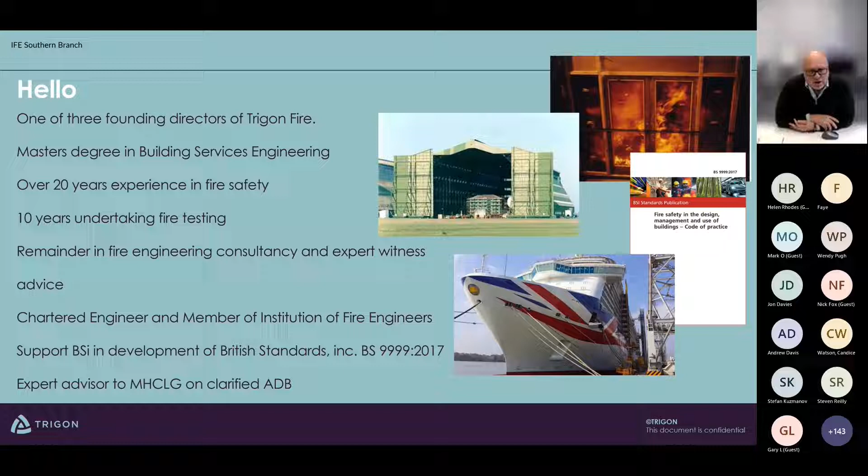I'm also a chartered engineer through the Institution of Fire Engineers. Going forward, Trigon Fire Safety was founded by myself and two fellow chartered engineers, Carl and David, just celebrating our 3rd anniversary. I don't know if you've noticed that on LinkedIn, I hope so, which has been a challenge going through COVID etc. as a new company, but we're flourishing and focused on relationships, which is the core of what we do. So hopefully through today we can start some further relationships with some of you who are present.

Anyway, let's get on to some of the technical content for today. As we know, the fire engineering community has gone through a large change since the tragic events in June 2017. We've seen all these various guidance documents, reports, and legislative changes issued in that interim period, and it's a significant amount of information to be shared, divulged, and digested. As fire safety professionals, it's been a significant amount of information to take on board.

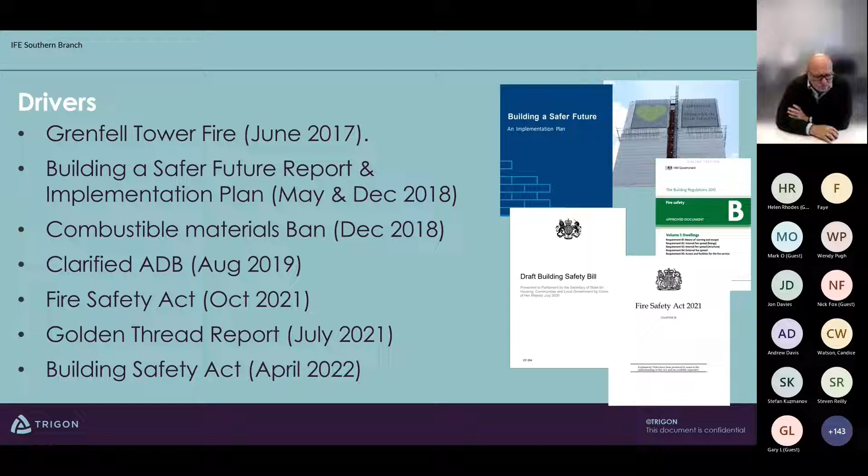It's worth reminding ourselves of the transitional arrangements and the forthcoming impact of the Building Safety Act, which obtained royal assent on the 28th of April this year, and looking at the future impacts of what we're going to see over the next 12 to 18 months from April. When you consider the amount of information and change coming through this timeline, we have to be extremely prepared, well versed, and cognizant of what is going on around us and how that's going to impact the wider industry.

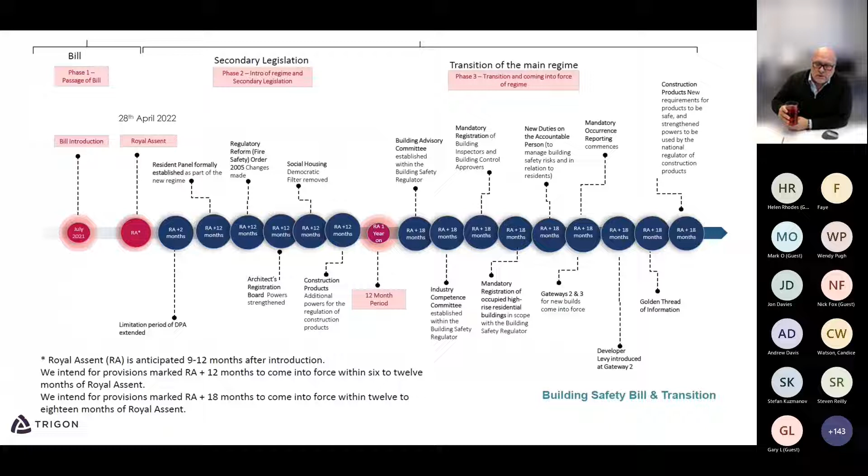Looking at this timeline, it would be my opinion that these dates of 12 months and 18 months following royal assent are the absolute maximums, where we're likely to see things changing considerably before these deadlines. So I wouldn't be surprised if a lot of this happens within the next 12 months, before Christmas of next year.

Picking up on some of the changes through the Building Amendment England Regulations brought into force this year, it was laid before Parliament on the 1st of June, coming into force on the 1st of December this year. It's an amendment to the Building Regulations 2010, where we've seen quite a few already, and it extends to both England and Wales, although it does not apply to any building in Wales. It's just a lovely way lawyers like to write these things.

It's worth remembering that these are legislative changes, not just changes to guidance. These are changes to the requirements that underpin the changes within the approved document.

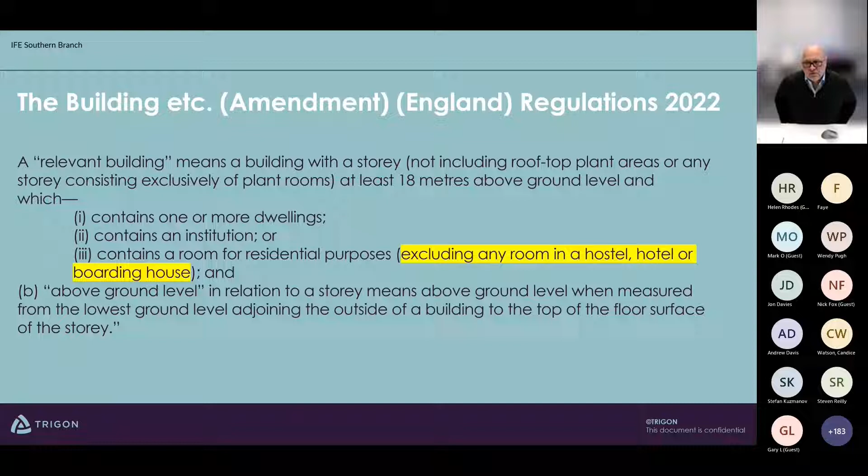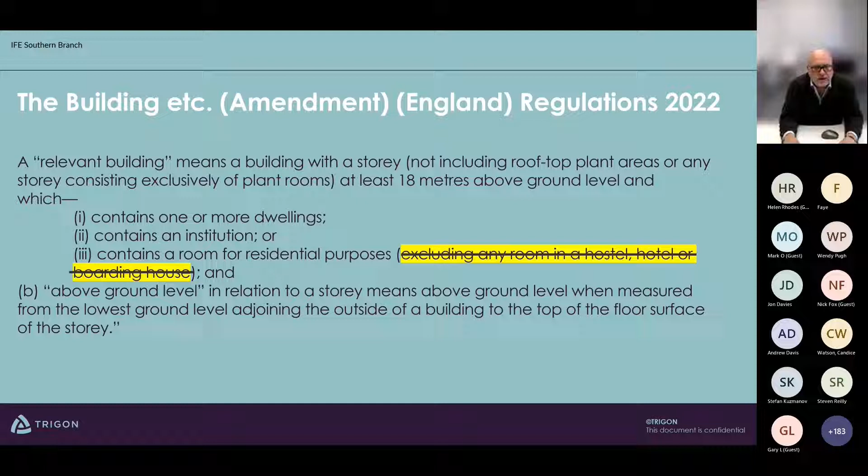One of the key changes worth pointing out is that the definition of relevant building has been changed. Previously, rooms in residential buildings or residential premises that contained a room in a hostel, hotel or boarding house were excluded from the requirements relating to relevant buildings. However, this has now been removed, effectively bringing hostel, hotel and boarding house into the definition of relevant building, extending the scope of Regulation 7.2 and all the other supporting requirements and guidance alongside that.

One of the largest, or most impactful changes these regulations have brought in is in regard to metal composite materials, commonly known as ACM and the like. It's a significant change in that any metal composite material which falls within the criteria of thickness, metal alloy, and calorific value as set out will no longer be able to become part of any building of any height on the external wall. So effectively a complete ban on metal composite material, ACM type material, across any building of any height as part of the external wall. As I've said, this is a requirement, not guidance - this is a legislative requirement.

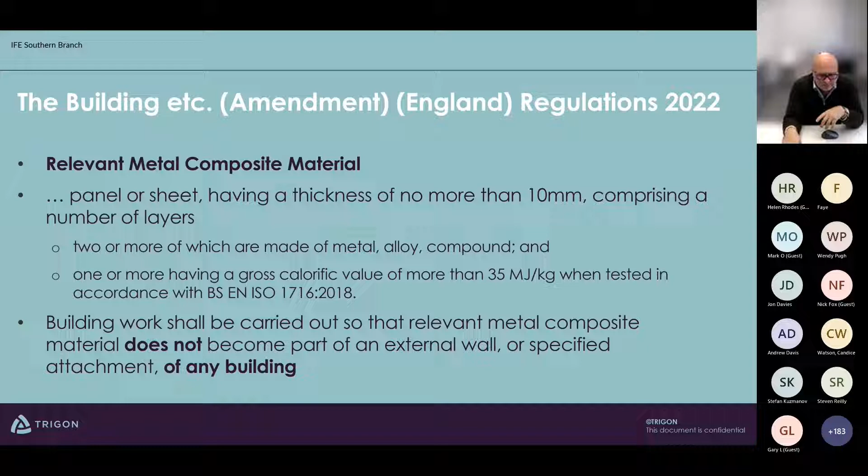Specified attachments - the definition of specified attachment has been clarified, particularly with regard to solar shading devices. Following the introduction of the 2018 amendment to the building regulations, solar shading device sales etc. were challenged as to whether there was enough consultation to actually exclude them from the ban. The definition of specified attachment has been made more robust and strengthened to ensure it addresses these aspects of solar shades, incorporating them within the definition of a specified attachment. So it's a strengthening of the legislation around that aspect.

Regulation 7.3, the list of exemptions from the ban on combustible materials as set out in 7.2, has been extended: fibre optic cables, waterproofing and insulation materials up to a height just above ground level of 300 millimetres. Again, parts of the solar shade that do not provide shade or deflect sunlight have been included within the exemptions. Furthermore, we have a new classification for flooring, where materials used on the floor that can't be correctly tested in the vertical plane are instead tested in the horizontal plane, as defined by A1 FL and A2 FL, which would be exempt from meeting the A2, A1 criteria for vertical aspects.

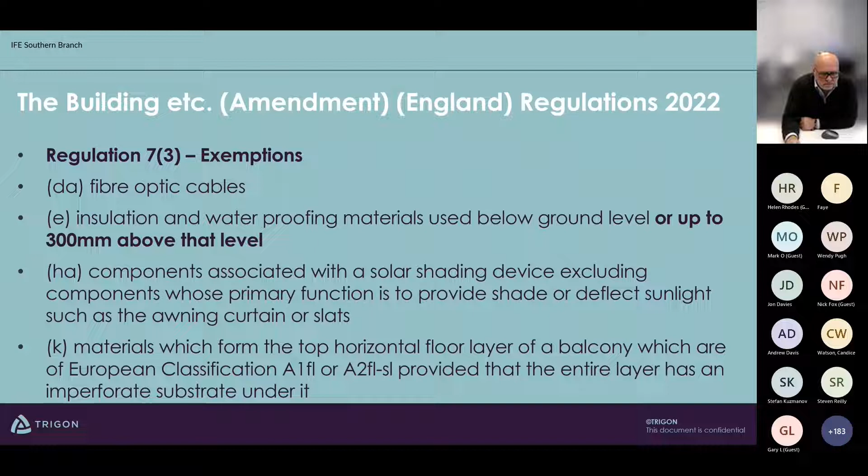This is a subtle change brought in by the amendment regulations, in that buildings, where the requirement for a change of use under Regulation 6 of the building regulations, the previous Regulation B41, regarding fire spread over external walls, was not applicable where the building height exceeded or was under 15 metres. You'd have to comply with the other sections of Schedule 1, B1 through to B5, but B41 wasn't relevant for buildings under 15 metres. However, that height has now been reduced to 11 metres of the height of the building, not the storey height, but the actual height of the building, to be more akin with other 11-metre thresholds presented in guidance and also in legislation elsewhere.

So that's just a summary of the key points of the legislation that has changed.

Now I'm going to come through and start talking about some of the key aspects of the changes to the approved document. I'd like to add two caveats here. One applies to the whole presentation: unfortunately this is quite a heavy presentation, it's a heavy subject, so there's a lot of content on the slides, so a slight apology for that. Also, I have not gone page by page, line by line explaining every change in comma, grammar, or every figure that has changed. That's really your job - I'm just trying to highlight some of the key changes to be aware of and some of the implications therein. To go through it line by line would be a whole day's exercise, so I'd encourage you to pick up the relevant guidance and go through it yourself. But this is just to give you a flavour and understanding of what those changes are and what the impact may be. So moving on to the approved document itself.

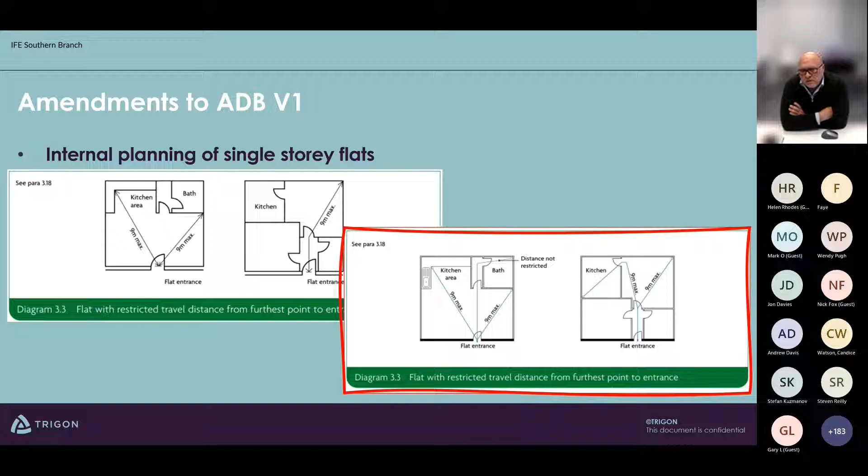So the diagrams are updated quite a lot. I haven't brought them all into this presentation, but it's worth going through just to understand what additional information they are presenting and illustrating for the reader and the application of the guidance.

Again, there's some guidance that's been updated, such as the lighting on common escape routes. Here's just an example where some people may perceive this as a lessening of the guidance, where if you've only got a 2-story block of flats, then you may not need to provide emergency lighting to comply with the guidance.

Obviously, there's still the absolute requirement to comply with the building regulations. However, the guidance may have been perceived to be a relaxation by excluding these 2-story blocks of flats. And again, it's worth going through the updated document just to see exactly how these paragraphs have been subtly amended to reflect current thinking.

Again, another one, just providing further clarification of how the guidance should be interpreted, and discussing that where a protected stairway passes from one compartment to another, it should be effectively within a protected shaft. Whereas previously some people may have said, once you're in a second compartment, we don't need an enclosure to it because the compartment protects. The protection to the compartment may be sufficient.

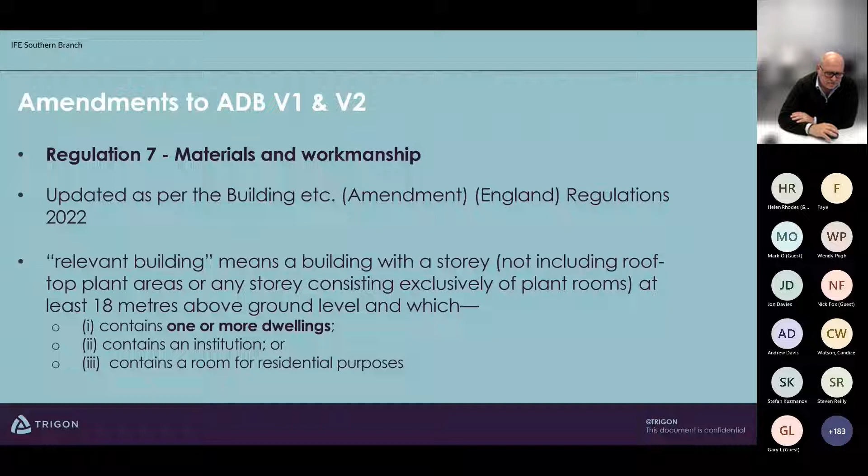One of the most significantly changed parts of the amended approved document is that information relating to fire spread over external walls has been completely replaced. So it's not been tweaked - I'm not saying that all the text and recommendations have changed, however there is a wholesale replacement of the text and introduction of new text. So this is a part where I would recommend that people spend some time to refamiliarize themselves and double check exactly what subtle changes there are.

However, one of the largest changes I identified was that further restrictions akin to the legislative requirement for the ban on combustible materials for relevant buildings has now been reduced down to buildings more than 11 metres in height. So here you can see highlighted that all residential buildings, purpose groups 1 and 2, more than 11 metres in height, will now have the same reaction to fire classification for their external surfaces of the wall as relevant buildings above 18 metres.

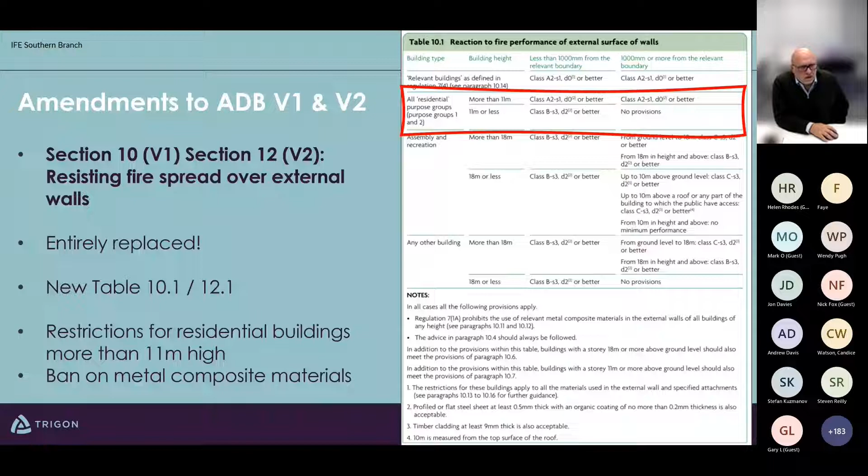Similarly, rather than just looking at the external surface, we have the same guidance from 11 metres or more on the materials used in the construction of the external wall, that it should achieve Class A2 S1 D0 or better, the same as the requirement for buildings above 18 metres as per Regulation 7.2. So again, it's not just the external surface, it's also the materials used in the construction of the external wall.

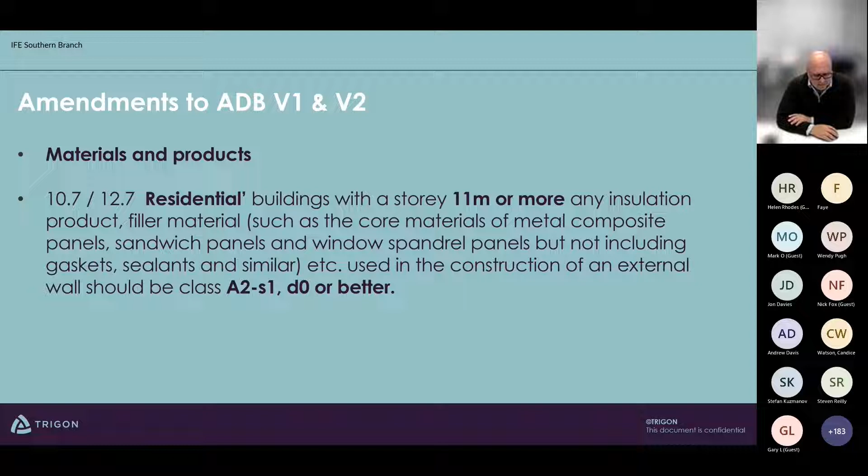Looking at balconies, there's now recommendations within the guidance that balconies of 11 metres or more achieve either one of the following conditions: either all the materials are Class A1 or A2 S1 D0, with some exceptions as set out within the guidance, or that the soffit itself is imperforate, has a 30 minutes fire resistance rating, and is of materials A2, S1, D0 or better, and that the surrounding materials have a classification of B, S1, D0.

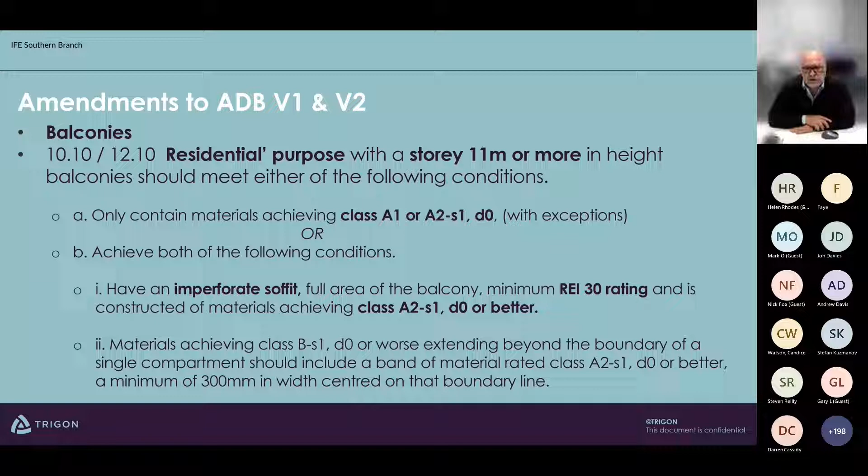It's worth remembering that if you were to adopt one of these criteria for your balconies, where the height of the building exceeds 18 metres, it would then be a relevant building, and option B would not be available to you because the materials must all achieve class A1, A2, S1, D0. So option B is really available to those up to 18 metres of height from this 11 metre threshold, so it's a band of 7 metres.

As previously discussed, introduction of the metal composite materials and the prohibition thereof. The requirements of Regulation 7.2 Requirement B4, looking at student accommodation, boarding schools, hotels, hostels, etc. And also, being updated to reflect solar shading and materials therein. It's quite interesting that there is a specific clause within the approved document that says that the curtain of solar shading devices cannot be classed as a membrane. So people who may have considered the curtain of a solar shade to be a membrane and therefore exempt by virtue of Regulation 7.3 of the building regulations, there is a recommendation within the approved document strictly recommending against this interpretation of the legislation and guidance.

Some further amendments to volume 1 of the approved document: evacuation alert systems being recommended for buildings with a storey height over 18 metres, and also that secure information boxes being provided with flats with the top storey over 11 metres. So as you can see, some additional provisions there.

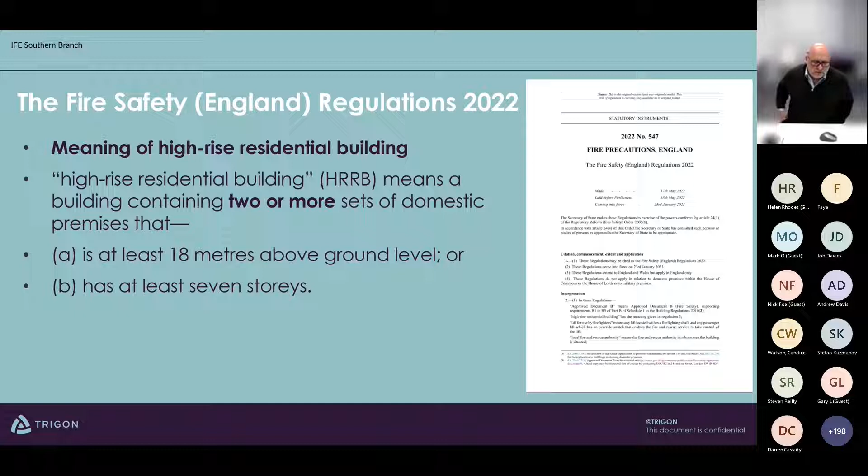Going through some of the most salient points in this legislation, as we saw within the approved document, there is a requirement for high-rise residential buildings to install secure information boxes. Together with the information box, we have to provide means for the fire and rescue service, local fire and rescue authority, to get access to these boxes. These boxes must be inspected, as well as their contents, on an annual basis. The wording in the legislation is very decisive - these must be installed - leaving very little room for movement.

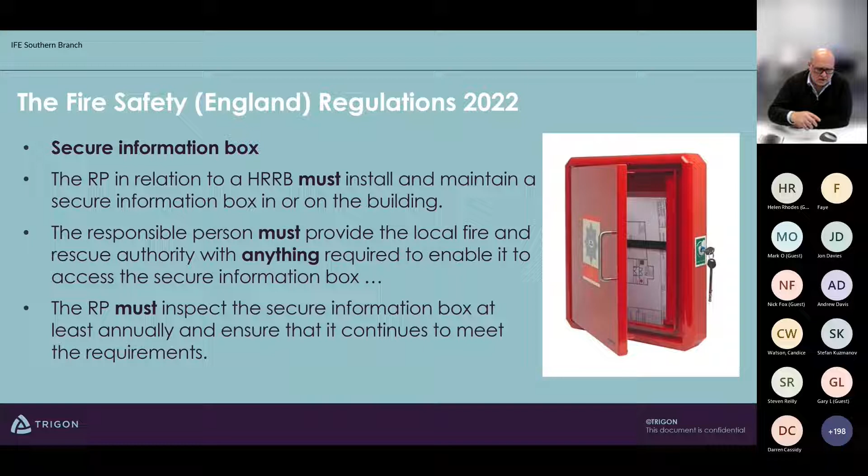Going on, looking at materials in the external wall, as we've discussed already. In relation to high-rise residential buildings, the responsible person must identify the risks presented by materials used in the external wall, and any mitigation steps taken, because they may or may not present a higher than acceptable risk to the building and its occupants. It's important to note that this information must be provided to the local fire and rescue service in an electronic format.

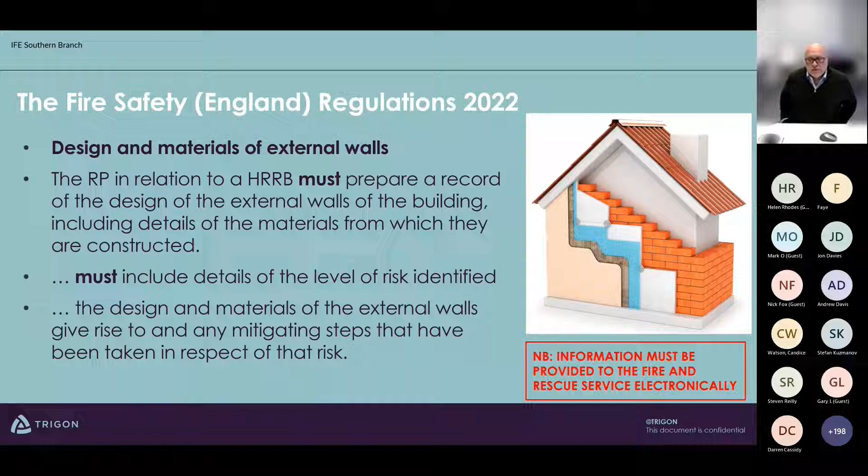So there is a communication point here between the responsible person and the local fire and rescue service. Furthermore, the regulations require that the responsible person must prepare floor plans of the buildings, identifying features such as lifts for use by firefighters, evacuation lifts, and key firefighting equipment. There must also be a hard copy placed in the secure information box, and this information should be shared electronically with the fire and rescue service. There's also a requirement for a single page building plan identifying some of the relevant information in addition to the plans.

I'll give you a brief overview of the level of information required: the environs of the building, access arrangements for fire appliances, the use of the building, dimensions, number of stories, basement levels, the presence of maisonettes or scissor section flats, dry riser and wet riser inlets, shut-off valves for sprinklers, access points to the building, location of the secure information box, location of controls and any smoke control systems, firefighting shafts, stairways in the main building, and the evacuation alert system. That's a lot of information to contain on a single page plan.

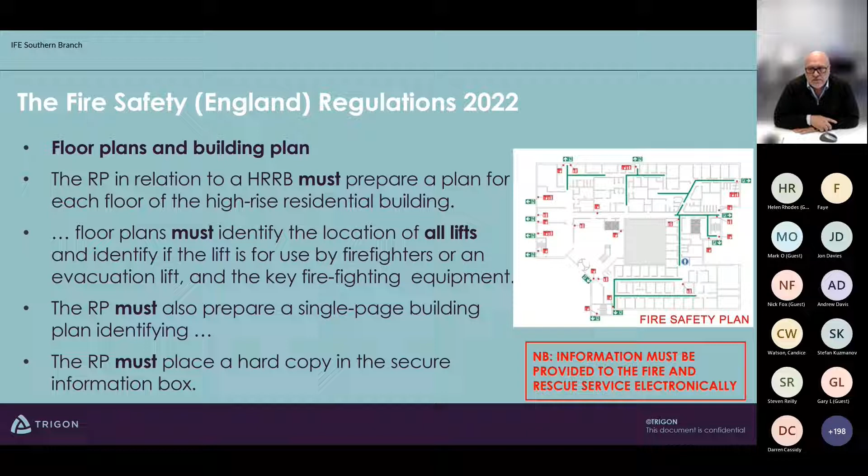So there is going to be a lot of information available, which, in accordance with the requirement, must be prepared and contained within the premises information boxes.

Going on, lifts and firefighting equipment must be under inspection, and routine checks must be undertaken of the lifts, evacuation lifts, and firefighting equipment in the building, relating to fire detection, fire alarm systems, evacuation systems, and door release mechanisms, all within common areas, on a monthly basis. If a fault is identified and can't be rectified within 24 hours, the fault and its subsequent rectification must also be reported to the local fire authority.

What does routine check mean? The definition of a routine check is that the equipment is in efficient working order, good repair, and carried out in accordance with industry standard - so whatever the manufacturer recommends for inspection, or a British standard, that would constitute a routine check.

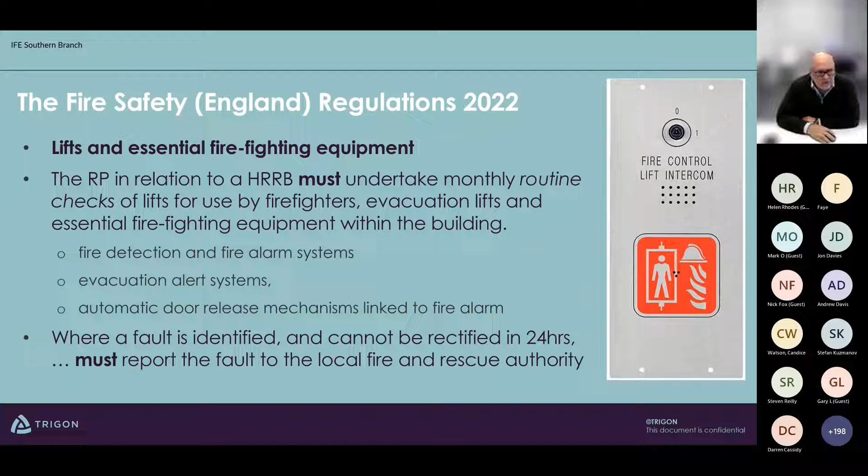Wayfinding signage. Previous recommendations and requirements shown in the ADB introduced wayfinding signage for high-rise residential buildings. However, now the Fire Safety England regulations have brought in requirements to ensure that existing high-rise residential buildings also have suitable markings to identify the floors and the flats accessed off each floor, in accordance with the guidance previously provided in the approved document. This now applies effectively to all residential buildings over 18 metres in height.

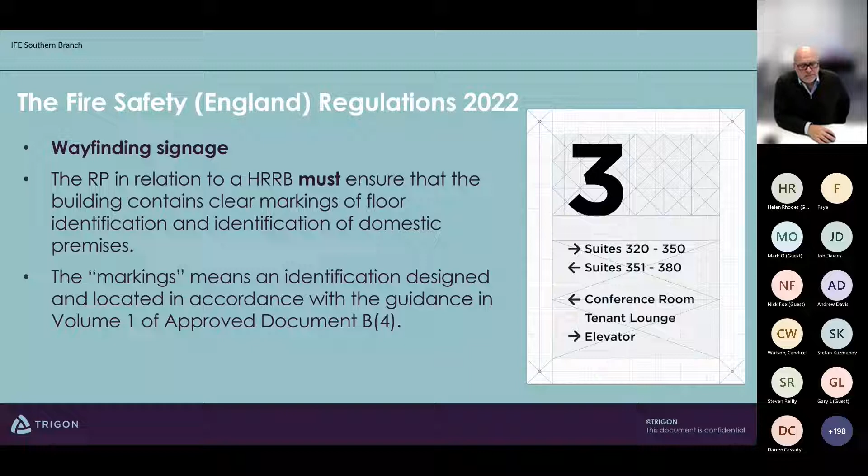Information for residents. Information being provided to residents, but not only to high-rise residential buildings, but to any residential premise which has got 2 or more sets of domestic premise and a common area through which the residents escape - so irrelevant of height. It would now need to contain the relevant fire safety information: what to do in case of fire, identifying it, sounding the alarm, leaving the building, etc.

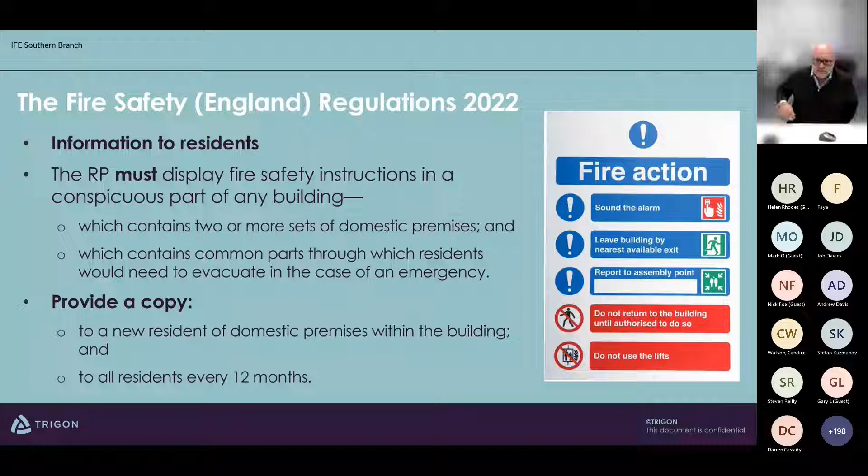Additionally, not only has it got to be displayed within the building, all new residents as they move in need to be informed and provided a copy, and it needs to be provided to all residents at least every 12 months. So the question is, how do some landlords know who's in or out of the building when premises are let or exchanged? That needs to be managed and controlled by the responsible person.

Fire doors - again, information must be provided to the residents on the use and importance of fire doors, which doors are fire doors, and information about them. Where we have buildings of 11 metres or more in height with 2 or more sets of domestic premises, best endeavours - a good term - should be used to check the flat front doors every 12 months. Access will be required into some of the flats, irrelevant of tenancy arrangements, but also fire doors in the common areas need to be checked every 3 months.

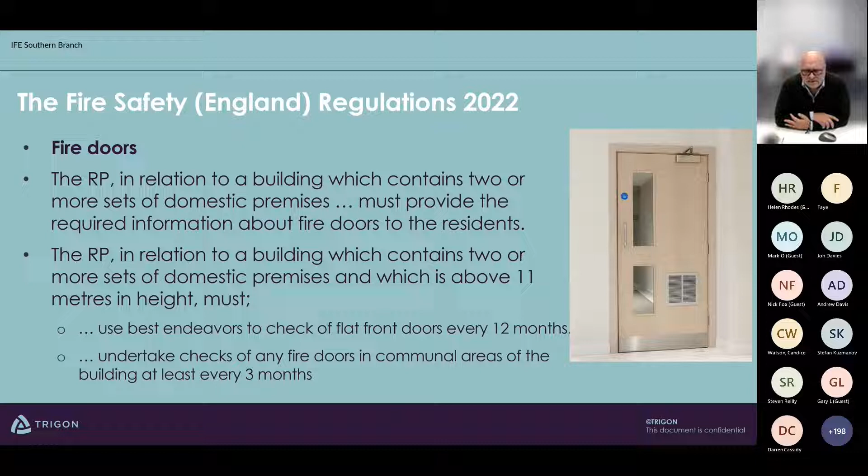So as you can see, there's quite an impact on existing residential buildings, both those above 18 metres in height - the higher risk buildings as defined by the regulation - but also those under 18 metres. There is still a significant impact on existing fire safety arrangements for the relevant persons.

So moving on, you'll be glad to know I'm nearing the end. Just to pick up on some other aspects of fire safety worth bearing in mind - I've talked a lot today about two pieces of legislation and a piece of guidance being updated. But we mustn't forget there are other items of fire safety advice, requirements, and topics ongoing and changing, such as the London Plan, competency, vulnerable and disabled persons, the new BS 9991, this ADB - will there be another ADB in due course? Planning Gateway 1, future Gateway 2, cavity trays. A significant amount of information will be forthcoming and available.

And one to pick up is some of the recent letters issued by BRAC and the government relating to provision of single stairs in tall and very tall residential buildings, and the applicability of the approved document. If you haven't seen these, it's worth getting onto the government's website under building regulations and reading what BRAC and the department are saying regarding the applicability of the approved document and how that should be digested.